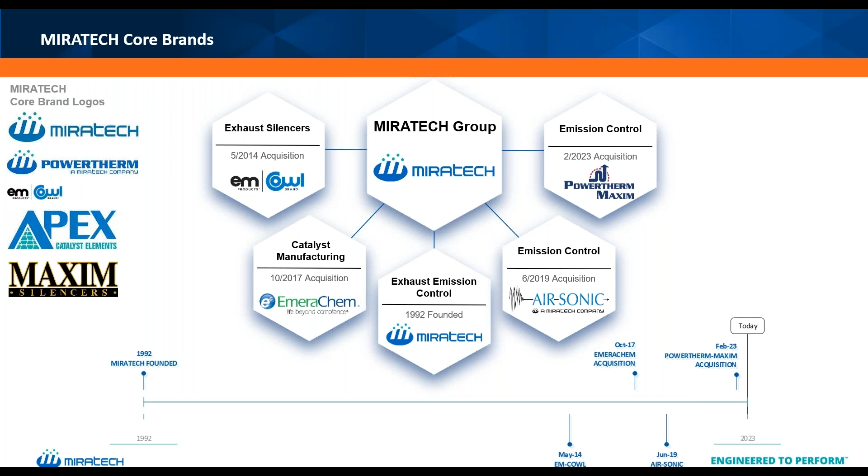Here's a look at our North American energy infrastructure landscape. We sell direct in all the blue areas, the dark blue areas, notably Oklahoma and Texas.

In the Rockies, our dealer is RJ Mann. They do a great job for us there, with offices in Kansas, Colorado, North Dakota, and Wyoming. Our dealer east of the Mississippi is AGES, and again, they've done a phenomenal job for us in that region, with offices in Pennsylvania and Tennessee.

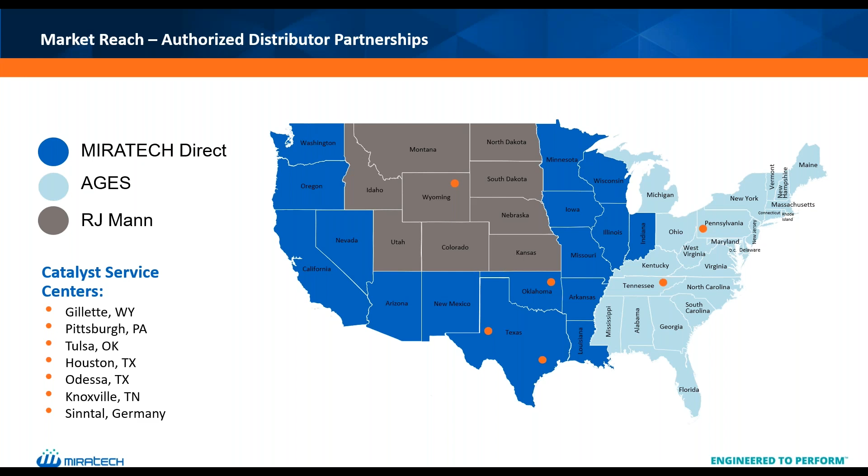All right, so we'll spend a minute now going through catalyst basics. This could be brand new information to some, or it could be just a refresher for people who have their hands on these every day. But the main point we'll try to get across here, staying at the 30 to 50,000 foot view, is just to hit on how and why a catalyst performs.

So this presentation is going to be light on animations, but I did think this was a pretty good one, just explaining what a catalyst does in essence. We turn dirty, harmful exhaust gas into clean gas, and to do that, it takes a series of chemical reactions to take place.

Each one of these reactions requires a certain amount of energy, and in our case, that energy is temperature. Without insanely high temperatures, these reactions aren't going to happen, and those insanely high temperatures aren't naturally occurring. So the difference between the left chart and the right chart is what we're able to achieve with the catalyst. We create that environment that allows those reactions to happen at much lower temperatures than they otherwise would. So in essence, that is what a catalyst does.

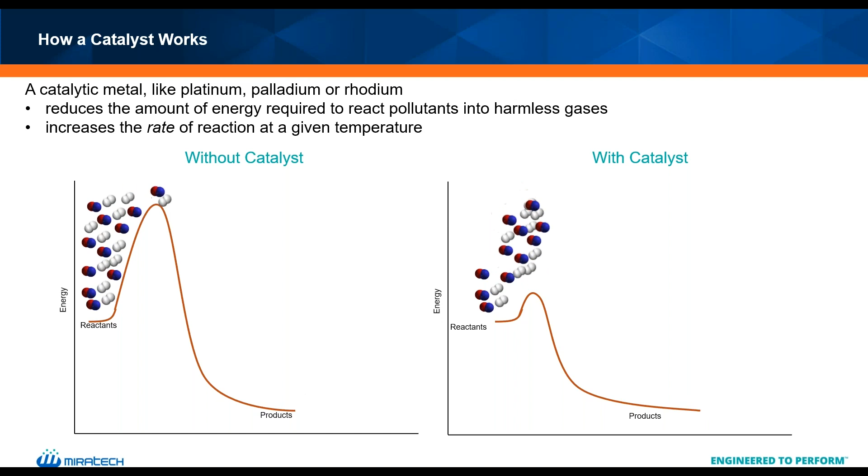All right, when working through a catalyst application, two of the main drivers we start with are the engine's fuel type and the air-fuel ratio. This webinar is focused on our Apex Catalyst offering, so we'll leave off the DPF and the SCR solutions for another webinar. If you go back in the YouTube library, you can probably find some good ones specifically on those two, so I encourage you to check out those. Today we'll just focus on the Apex.

Looking at natural gas engines, you've got two types, a rich burn and a lean burn. Starting with rich burn, these are going to be many of your Waukesha engines and some of the smaller Cat 3300, 3400 series engines. You've got an oxygen content of less than 0.5% in the fuel, which means there's exactly enough air to combust all the fuel in the cylinder. These rich burn engines have hotter exhaust temperatures and generally higher emissions, and we use a three-way catalyst to remove NOx, CO, VOCs, and HAPs.

Moving over to a lean burn engine, all diesel and dual fuel engines fall into this lean burn category too, so just lump those in there. The lean burn engines are going to be a lot of your larger horsepower engines, maybe think of a Cat 3500, 3600 series engine, and you're going to have an excess amount of oxygen in the fuel. These generally have cooler exhaust temperatures and lower emissions compared to a rich burn engine. We'll use an oxidation catalyst in a lean burn environment, which eliminates CO, VOCs, and HAPs.

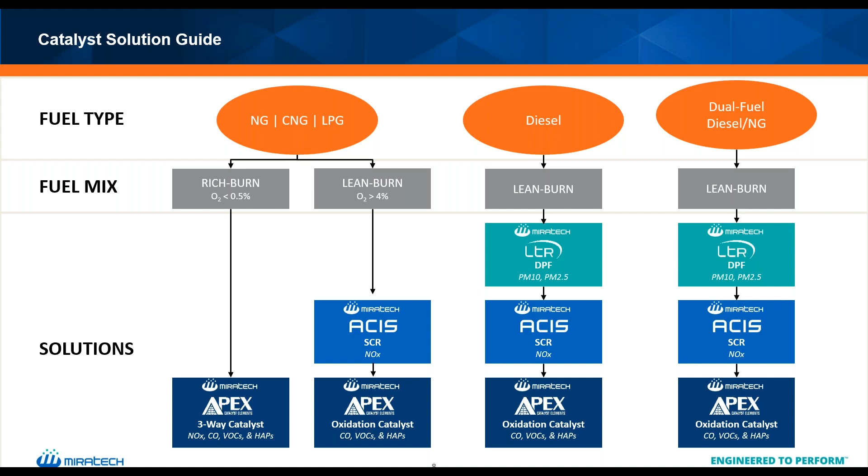Drilling down more into our oxidation catalysts, these are only going to be used in lean burn applications. I've been asked a lot of times if you can put an oxidation catalyst in a rich burn engine, or a three-way catalyst in a lean burn engine. The short answer is no, please don't do that. You're not going to get any significant performance, and more often than not you're just going to ruin the catalyst and it's going to end up being a big money spend. So just keep the oxidations in the lean burn, and keep the three-way elements in the rich burn engines.

With the oxidation catalyst, we're focused on removing VOCs, which are also known as non-methane, non-ethane hydrocarbons. You'll hear me use those two terms interchangeably today, but anytime I say VOCs, that's what we're talking about. Over to the right we've got some chemical compound images for you, including butane, formaldehyde, and others. These make up 85 to 95% of the VOCs that are regulated.

So last time, we're focusing on the Apex Catalyst today. If you do have an SCR or DPF need, please reach out offline. I'll be happy to get in touch with you or get you in touch with the right person to help with that.

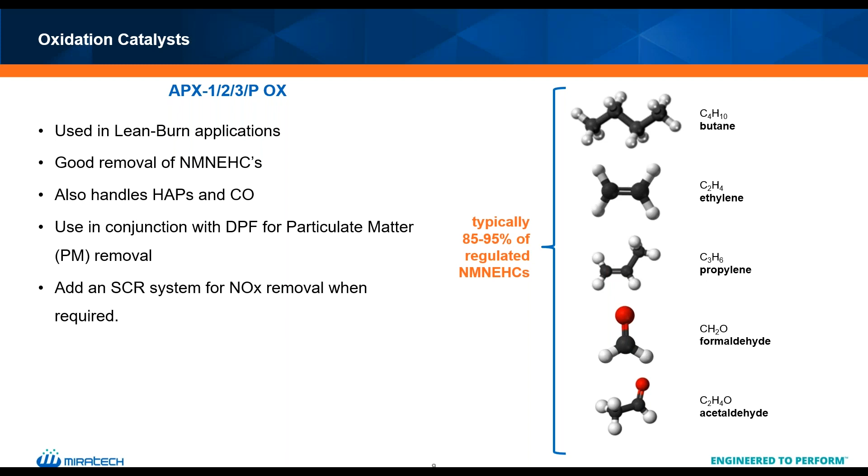All right, looking at our three-way catalyst now, and if you like chemistry, this is a great slide for you. We've got all the reactions over there on the right, but the main takeaway is our three-way catalysts are for rich burn applications. Don't mix them and put them in a lean burn engine. One of the things that's particularly important in this rich burn environment is getting that air-fuel ratio right. These catalysts facilitate the reactions, but they can't do that if the environment's not right. So a rich burn engine has to have that air-fuel ratio dialed in to the proper lambda window. Otherwise, the catalyst isn't going to perform to a maximum level.

We've got a whole other webinar on that too, I believe, or another presentation. There's a lot that goes into dialing that air-fuel ratio in. So if you have more questions on that, we can talk about it offline, but just something to note that that's extremely important for three-way catalyst performance.

The three-way catalyst destroys everything that an oxidation catalyst does, CO, VOCs, and HAPs, as well as NOx. So you can think of it as kind of an all-in-one catalyst solution, because you don't need that SCR system to take care of all the regulated pollutants.

Taking a look at those chemical reactions over there to the right, really what we want to get out of this is that we've got a ton of dirty pollutants coming through our engine exhaust and hitting the catalyst. They go through a series of those chemical reactions, and the byproducts end up being water vapor, carbon dioxide, and nitrogen, which all three of those are naturally occurring compounds.

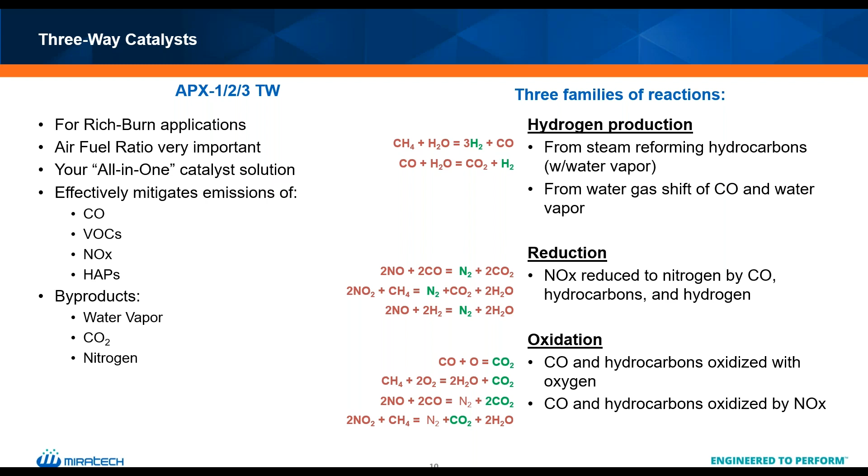All right, so what is the catalyst and what is it made of? We'll start with the substrate. This is the backbone of the catalyst. It's a metallic structure made from metallic foil. All the round ones are wound and the rectangle ones are stacked up and welded together, so there's a very tight seal and they're not going to come apart. This gives the catalyst its shape and creates turbulent flow, which causes all those molecules to bump into each other and make those chemical reactions happen.

Finally, the last key piece of this catalyst is the precious metals. These are deposited on the wash coat and they help promote all the necessary chemical reactions to take place. They're also the reason that many of you have probably had your catalyst stolen over the years, so make sure to keep those locked up. It's kind of similar to people taking copper wire and sending it to a scrapyard - they do that for the copper, and there's precious metals inside each catalyst that you purchase from MIRATECH. So again, keep those locked away and stored in a safe spot.

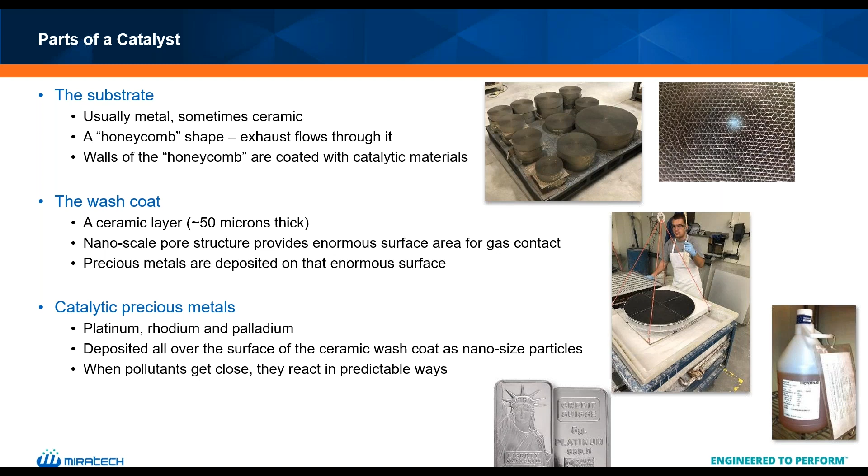All right, so this is a microscopic view of that wash coat that we talked about. Again, this is that ceramic layer, 50 microns thick, about half as thick as that layer of paint on the wall. And here you can kind of see all these caverns that get made, and that's the tremendous amount of surface area that it creates.

It's where all the precious metals get deposited, and all this surface area allows plenty of opportunity for those exhaust gas molecules up top to come in, flood those microscopic caverns, react with each other, react with the precious metals, and then exit the catalyst as components of water vapor, carbon dioxide, or nitrogen if you're in a three-way element.

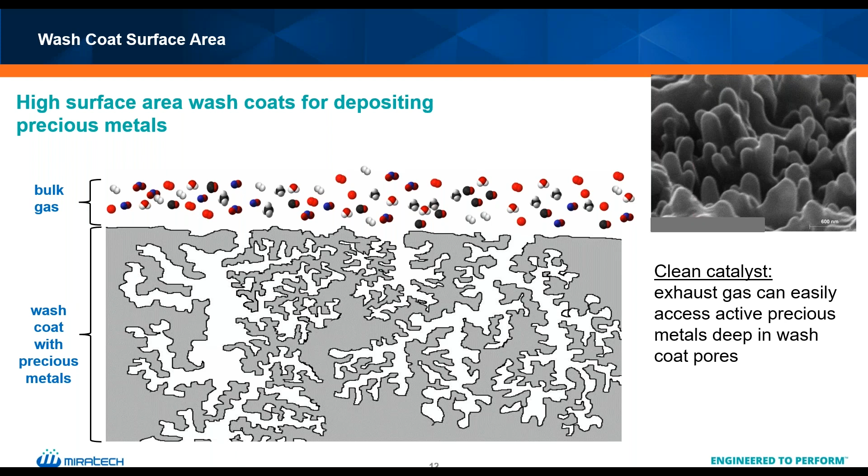This is a picture of a clean catalyst, and we'll move on here to kind of what a dirty catalyst looks like. Top right is a picture of it. You guys have probably seen something like that over the years, and unfortunately, this is kind of just a reality of where we're at right now.

You can't prevent this from happening over time. Ash and contaminants are going to block those pores. That's going to prevent your exhaust gas from accessing all those caverns and all the surface area that your wash coat makes, and it's going to prevent your catalyst from being extremely effective.

Eventually, your catalyst is going to need to be washed. I talked about our catalyst service centers being located in all the major shale plays. We're going to take it to one of those, and this will restore it back closer to its original performance.

So this ashing up is inevitable. Maybe on the next webinar that I do, we can introduce a forever catalyst that works no matter what's going on upstream with the engine. But a lot of this ash is created from burning up of lube oil. And so that's something that we just can't get away from right now. And this is the reality that we live in.

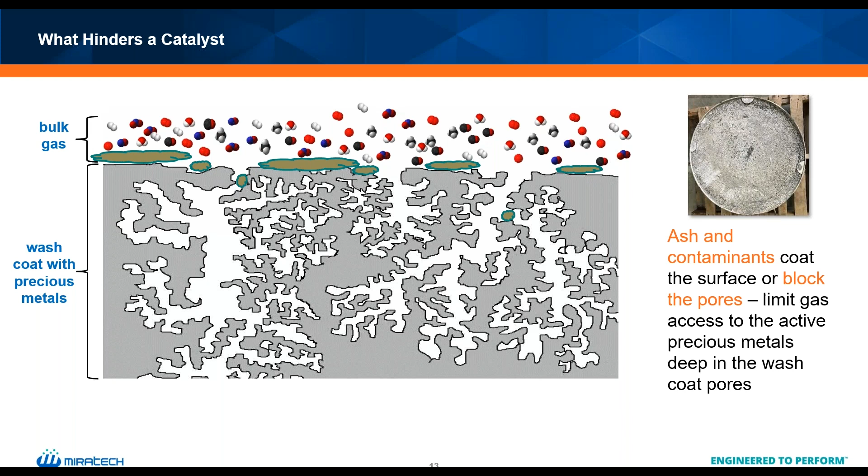So something that MIRATECH has paid special attention to is precious metal distribution. And that's our platinum and rhodium that we talked about earlier. We start by using the finest grades of platinum or rhodium available, and then we put that through a proprietary process that's going to evenly distribute those precious metals throughout the wash coat.

This prevents the metals from clumping up, like you can see at the top, and dramatically improves our reaction sites. So just comparing the reaction sites from top and bottom, there's a huge amount more whenever you're evenly distributed throughout the wash coat. That's going to result in a lot more touch points, a lot more reactions, and in turn lead to better catalyst performance.

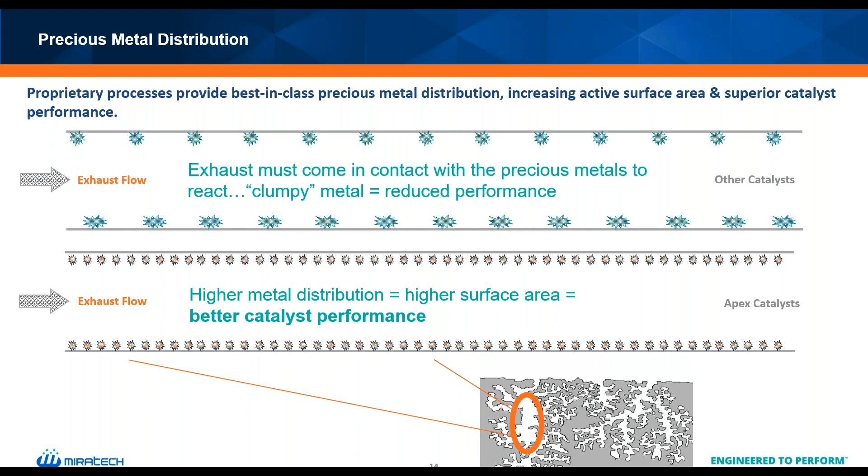Moving on here, another factor for catalyst performance, we've got two: precious metal loading and operating temperature. Precious metal loading is something that gets talked about quite a bit, and I do want to say, so throwing more and more platinum or rhodium at a catalyst is going to make it more effective, but only to a degree. We found that increasing the precious metal loading by 40% is going to give you about a 5% performance bump. So you can't just go nuts with this.

It's a balance. And if you don't have everything else right in your catalyst manufacturing process, then throwing more and more platinum on the oxidation element isn't going to provide any meaningful value. You're just going to end up with a really expensive catalyst.

On the right-hand side, what we're showing is how effective catalysts are at removing specific pollutants at different temperatures. Some of you guys may have experienced this - this chart's just for oxidation elements - but you may have experienced the hotter you go, the better performance you're going to get on CO and VOCs, and that's exactly what we're showing here. Temperature is paramount. As much as you can increase that temperature close to 900, we're going to get better and better performance.

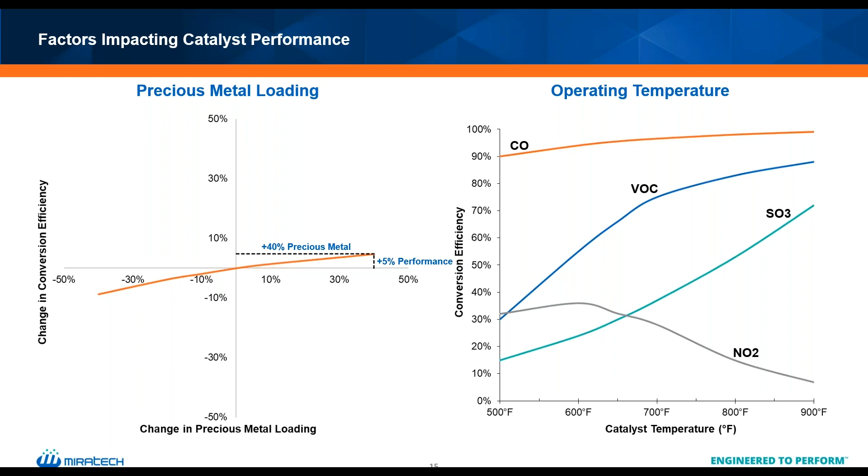All right, two more factors. We're talking about space velocity and, again, operating temperature. So space velocity, or sometimes if you want to get technical, we'll call it gas hourly space velocity. But what we're really just talking about is how long the exhaust gas spends in the catalyst. And as you might guess, on the left-hand side is where we've got the most amount of time spent in the catalyst. That's going to be where our best performance takes place.

So one way we can play with this is by adding elements to the housing or sizing larger catalysts if we're on the front end of the design piece. Just really trying to play with it and see what we can do to allow more time for that exhaust gas to stay in the catalyst and facilitate more and more of those reactions. We want to slow down that flow is really what this is.

And so whenever we're sizing solutions, we do have a minimum value for that space velocity to ensure that any emission solution that MIRATECH puts forward, sends out to our customers, is going to have that necessary exhaust time spent in the catalyst so that all those reactions can take place and we can hit the performance that we're guaranteeing.

Looking to the right-hand side, these are different hydrocarbons and the effectiveness we get at destruction at various temperatures. Really what I want to focus on here is propane, because that is one of the most difficult hydrocarbons for us to remove. We really don't get too much meaningful performance in that 80, 85, 90 range until we reach 900 degrees Fahrenheit.

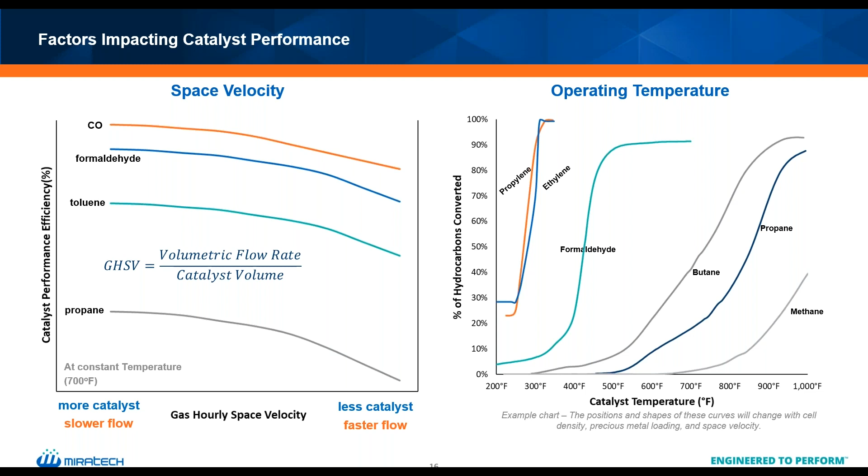So it's a huge deal to get that temperature right, especially if you have tight VOC targets. And again, propane can cause some issues if you've got a lot of it in the fuel. We'll talk about that in a minute.

So I mentioned whenever we acquired Americhem in 2017, we gained full control of our catalyst manufacturing processes. We make all of them in-house in Knoxville, and this gives us the ability to match our customer scope, whatever it may be—round catalyst, square catalyst, rectangle, with a bonnet, without a bonnet, flanges, hoops, whatever that may be, we can match whatever application our customers have.

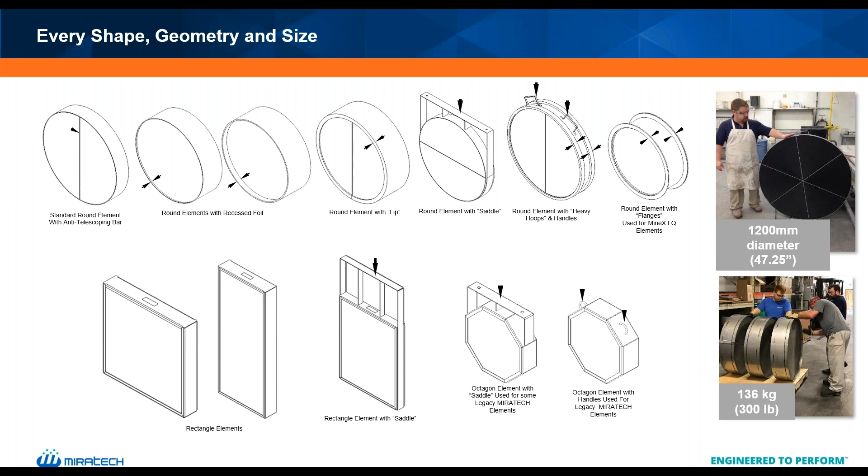Then finally, last slide here on catalyst basics. We've been stocking a lot of elements. That's something we've put a lot of importance on recently. We've got warehouses in locations across Oklahoma and Texas. This really just goes back to meeting our customers' needs and thinking about what we can do to surpass our customers' expectations as a catalyst supplier.

Also in Knoxville, we keep a good amount of uncoated inventory available. I think that's what you're seeing on the bottom right. These are catalysts where we've already made the foil up, we've already got the metallic frames on there. All we need to do now is coat it and put it through the oxidizing process, and that's going to allow us to cut down on our lead time so that you're getting a brand new catalyst in half the time as you would if it were made from scratch.

So I encourage everybody on this call, please reach out to your local MIRATECH or PowerTherm rep and let us know what your high movers are. We'd be happy to work with you guys and stock inventory on our shelves to help your operations run more smoothly.

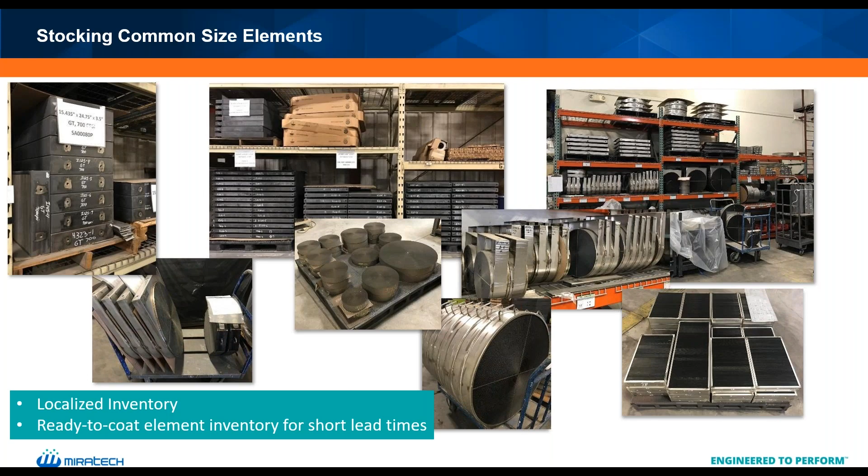All right, hopefully that was a good refresher on catalyst basics, again just trying to get into the how and why behind catalyst performance. We'll move on now into what's new with MIRATECH, which is our Apex Catalyst product line.

One of the things we had to do when combining companies with PowerTherm was to come up with a collaborative catalyst formulation and take the best pieces of both companies' products and create a new singular product solution. These synergies resulted in a catalyst element that we believe to be at the very top of the industry, the apex, if you will. So we called it the Apex Catalyst.

Backed by decades of design experience, we're happy to introduce more options to our customer base with a 1-year, a 2-year, and a 3-year catalyst. The only catalyst on the market with proven methane destruction, and a best-in-class propane catalyst with unrivaled performance and a 3-year warranty.

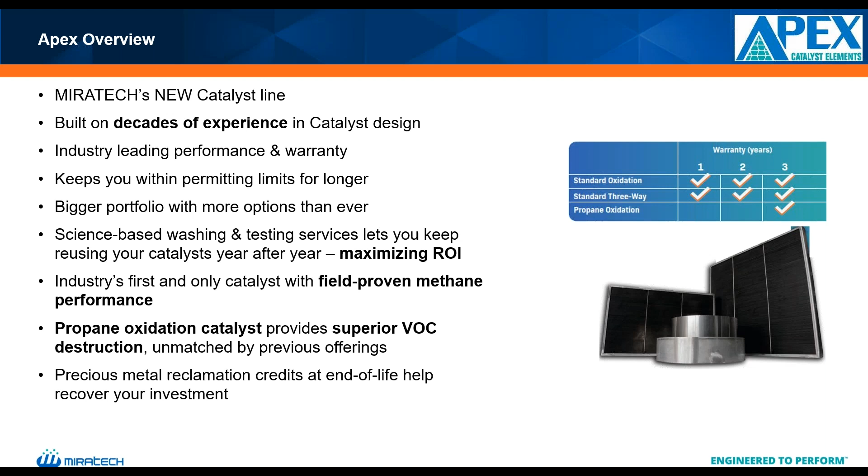Here's a snapshot of our Apex Catalyst portfolio, and with MIRATECH, you now have options. In both oxidation and 3-way formulations, we've got a 1-year catalyst, a 2-year catalyst, and a 3-year catalyst. You can think of these as our good, our better, and our best offering that allow us to meet whatever specific needs our customers may have.

Throughout our customer base, there's different reasons for having different preferences. Maybe somebody wants a 1-year or a 3-year, and we've seen that happen and play out throughout the years. So what we want to do is make sure that each customer in that base has a solution they could be happy with and move forward with.

The Apex 3-way element is what we've tested methane destruction on, and our high propane catalyst, again the Apex P propane catalyst, comes with the unmatched 3-year warranty.

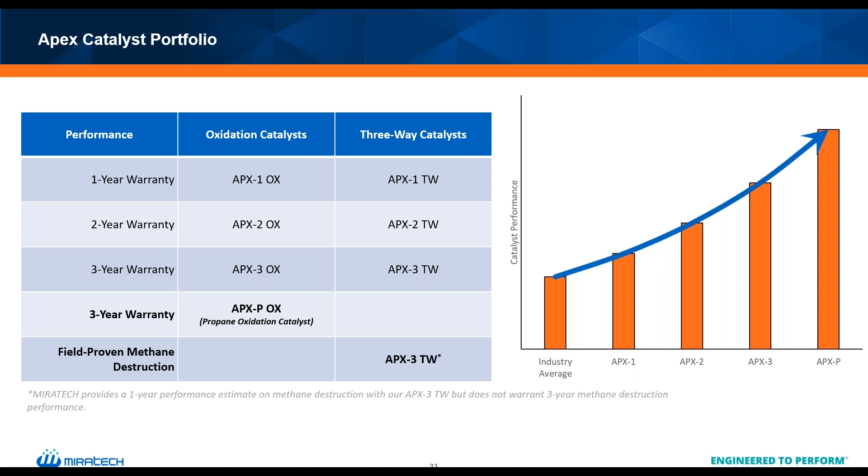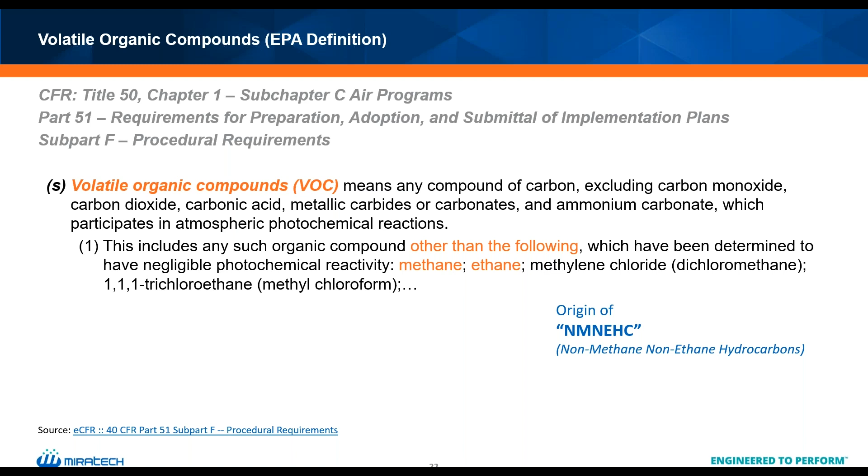What's difficult about these VOC compounds is that depending on the exhaust gas composition, these can be more difficult to remove than your standard CO or NOx. In certain cases this is going to require a lot more catalyst volume than standard to meet basic targets, and our high propane catalyst is something that can overcome this.

For most lean burn applications, a standard Apex 1, 2, or 3-year catalyst is going to do great. We talked earlier about how propane is the hardest of our non-methane, non-ethane hydrocarbons to remove. So whenever a large amount of propane is present in the fuel, it really drags down our VOC performance.

If there's a ton of propane that makes up most of your VOCs, and that propane is the hardest one for us to get rid of, then if you've got a tight VOC target, it's going to be even more difficult to hit because that propane is still going to be there and it's not going to go away easily.

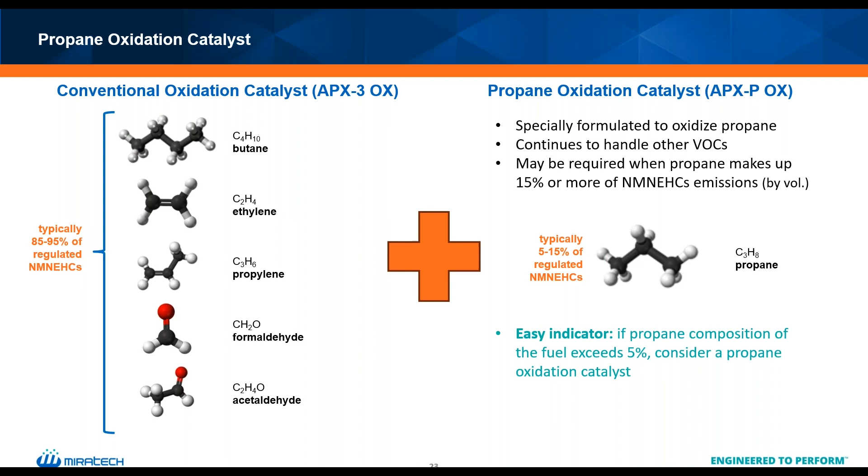We see this happen usually around 5% of propane in the fuel, and our Apex P propane catalyst has been specially designed to overcome these high propane situations and perform even in difficult applications. So as a rule of thumb, if you have 5% propane in your fuel, we recommend you step up and consider the premium Apex P propane catalyst option.

Here's a real world scenario, I believe from the Marcellus, where a customer came to us in one of these applications. We had propane in the fuel at 7.76%, a VOC target of 0.7 grams. Working with them on a spec sheet, we were able to get 4 standard catalysts down to 0.6 grams of VOC.

So we're meeting the target just barely - everybody's happy. But if you want to take it a step further and look even deeper, we can do a much better job with the Apex P propane catalysts. Using half the volume, so only 2 elements, we're able to get all the way down to 0.2 grams, which leaves us with a ton of cushion.

Customers can sleep easy at night, not worried about maybe some wells getting shut in, an anomaly going on with the fuel, and then that 0.6 bumps up out of the 0.7, and now you're no longer in compliance. The Apex P catalyst gives you that peace of mind.

It's something we're really excited to move forward with. This catalyst is washable and comes with a 3-year warranty. So it's not something you put in once and have to buy every single year because you can't wash it and it won't last. This has proven to be a very large performer for us, and we're happy to back it with that 3-year warranty.

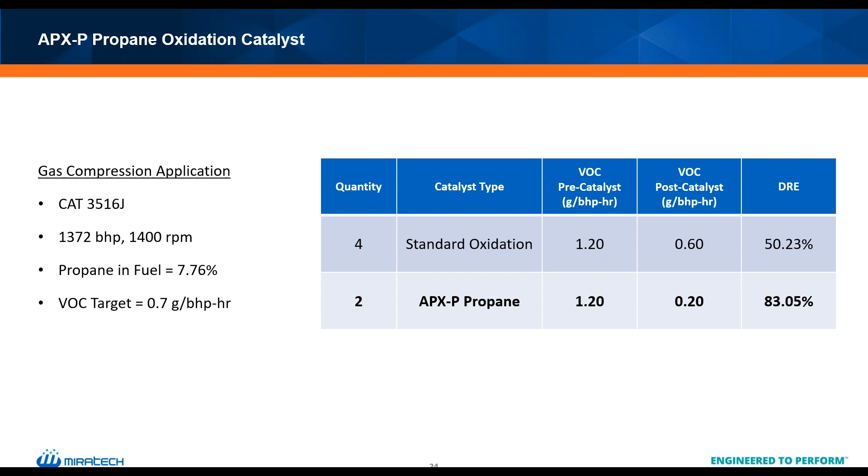Moving over to methane now. As some of you may have heard, the Inflation Reduction Act passed last year, but what you might not know is how it could impact U.S. oil and gas operations in the near term.

Putting politics aside for now, the Inflation Reduction Act is set to tax methane emissions starting in 2024. This would be the first nationwide fee on any greenhouse gas, so methane is definitely something the government is paying more and more attention to. The American Petroleum Institute, a kind of governing body for oil and gas also known as API, is looking at what the industry can do to reduce methane emissions and avoid some of these taxes.

We've got a couple other quotes here. Taking a look at the graphic on the right, these are some of their proposed solutions: minimizing compressor emissions, minimizing blowdowns, reducing flaring, and retrofitting equipment. MIRATECH is happy to step in on some of these parts and proactively be part of these methane reduction solutions.

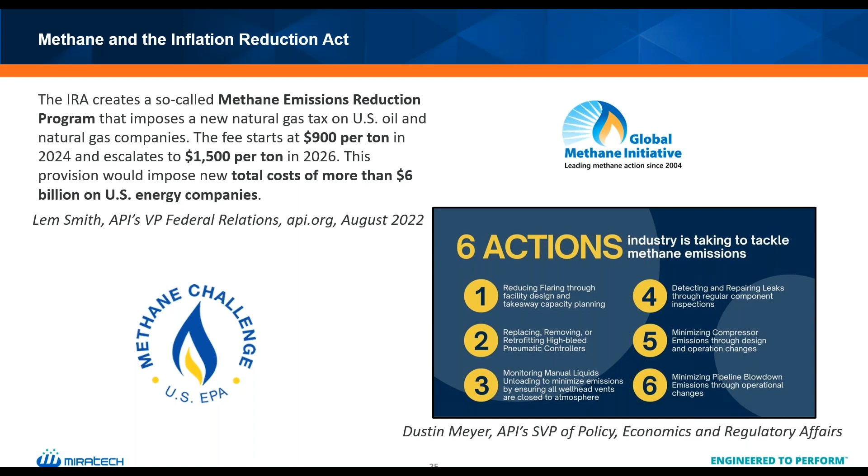Companies are being graded more and more by Wall Street on their ESG performance - that's been happening for a few years now. That's where terms like decarbonization and net zero footprint are coming from. Methane emissions are also lumped into that ESG performance category.

Methane is a colorless, odorless gas, and it's the main component in natural gas. Compared to CO2, which can linger for centuries, methane has a lifespan of about 15 years. CO2 is what a lot of these greenhouse gases are being compared to - you may have heard the term CO2 equivalent. That's exactly what we're talking about here, and the EPA uses a factor of 25 when talking about methane as a CO2 equivalent.

But lately, we've been starting to hear more references of that 25 being actually closer to 80 when you take into account the lifespan of methane only being 15 years, whereas CO2 is 1 to 200 years in the atmosphere. This is one reason why it's being targeted, because reducing methane emissions today can have a more immediate impact. It's the low-hanging fruit, so to speak.

We're seeing more and more companies and corporations start out and say that we can do better, and this is happening all across the world in different industries. The government moves pretty slow, but methane is near the top of their list when it comes to air pollution, and MIRATECH has the technology to help be part of that solution right now.

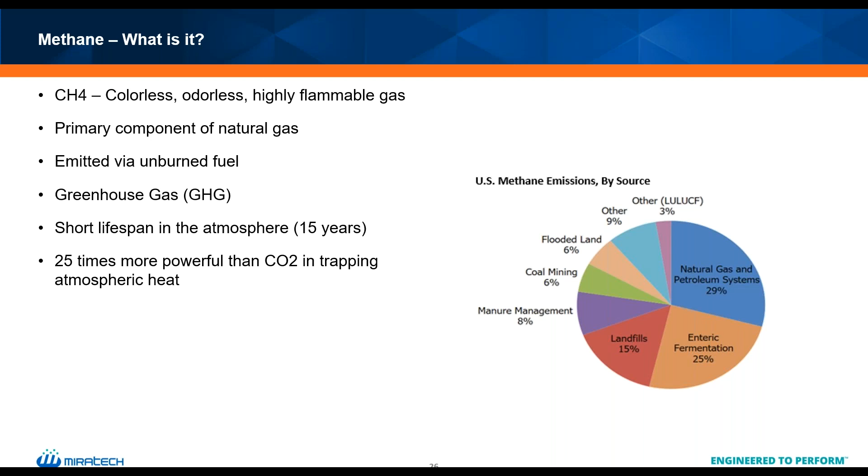I do want to point out this graph, this pie chart on the right. We've got natural gas and petroleum systems as the leading methane emitter at 29%. This chart came from the EPA website, but I'm a huge proponent of oil and gas here, so it wouldn't feel right if I didn't point out that enteric fermentation at 25% and manure management at 8% are both underneath the agricultural umbrella. I don't think that making the ag guys the bad guys worked out as well as making the oil and gas people the bad guys, but it wouldn't feel right if I didn't point that out.

I thought this was a really great picture, illustrating the various points along the oil and gas life cycle from the wellhead to the end user where methane can be emitted. MIRATECH can come into play along some of these points and help reduce this with our Apex 3 three-way catalyst. Looking at these orange circles, we've got compressor stations, booster stations, plants, and underground storage. Really anywhere that you've got an engine and a compressor, we can come in and be part of the solution to reduce your company's methane emissions and help out with that process.

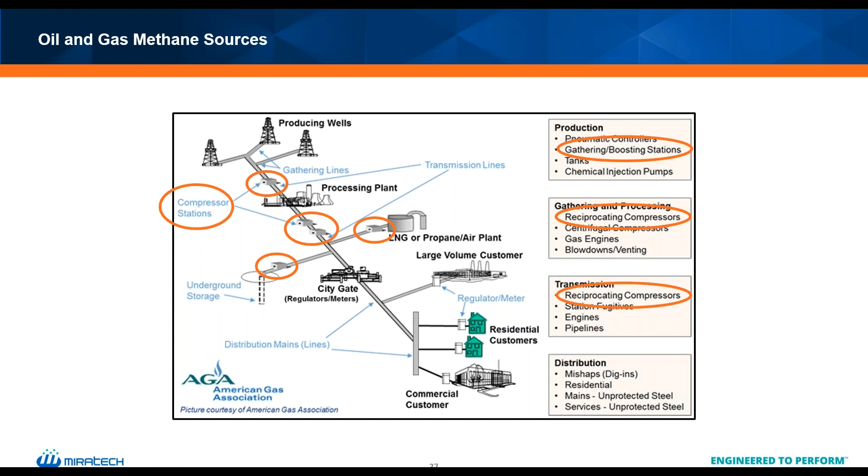This really all took shape for us when some end users came to MIRATECH looking for a solution for methane destruction to aid in achieving some of their aggressive ESG goals. We performed field trials on multiple engines for them with our Apex 3 three-way catalyst, and doing that, we were able to quantify how much methane was reduced in each scenario.

Using that Apex 3 three-way catalyst is going to help contribute to a company's ESG efforts and can have their natural gas certified as responsibly sourced gas, or RSG, which is definitely something to look into. I have seen a lot of companies start promoting that RSG to their end users, to their customers, and to their shareholders.

The methane estimate is offered only on our Apex 3 three-year warranty catalyst. It's not offered on the Apex 1 or the Apex 2 elements, and it's only for the first year of life.

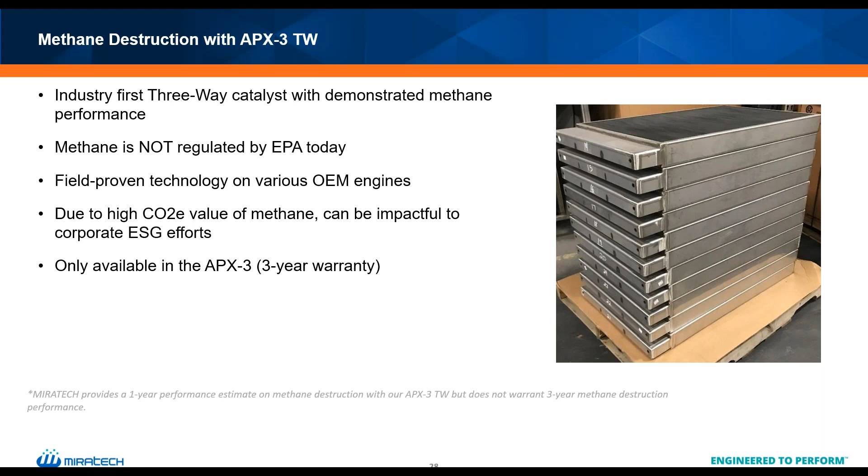So here's some example data from some of those field trials that we performed with the Apex 3 three-way catalyst. We're showing methane estimates on the low, medium, and high ranges and potential tax figures from the current legislation for 2024, 25, and 26.

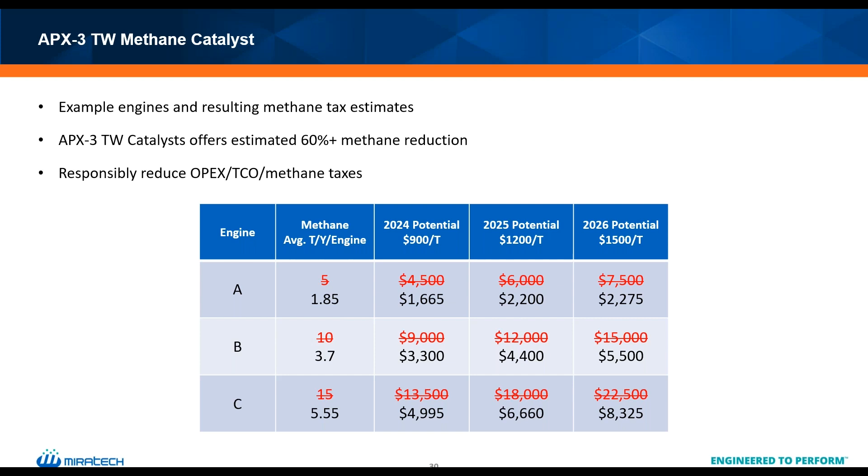Using this Apex 3 three-way catalyst, we can decrease those costs by over 60%. Looking at how the legislation reads right now, this can end up saving your company tens of thousands of dollars per engine per year in excess methane emission fees. So what MIRATECH is offering with this catalyst is allowing companies to responsibly reduce their operating expenses, responsibly reduce their total cost of catalyst ownership, and responsibly reduce their potential methane taxes, all while contributing to the company's ESG goals and doing their part in being a responsible producer.

So bringing it all together, our new Apex line is something that we've spent tons of time and resources developing, and we're excited to bring it to market. People talk sometimes about catalysts as kind of a commodity product, and hopefully today we're able to illustrate that with all the time we've spent on R&D between our wash coat, our precious metal distribution, and some of the value adds that we're giving with methane destruction and high propane applications that other people can't match. MIRATECH is not in the business of providing commodity products, and the Apex is not a commodity product.

We've got a 1, 2, and 3 year solution for any of our customers. We've got a 3-way catalyst that provides methane destruction, a best-in-class propane element with a 3-year warranty, and every shape, geometry, and size you could want. We have control of our own catalyst manufacturing, so if you want a triangle catalyst or something like that, we could make it for you. And you're not losing anything with the Apex elements that you were with previous MIRATECH offerings. You're getting your same high quality, high performing catalyst that you've been used to with MIRATECH.